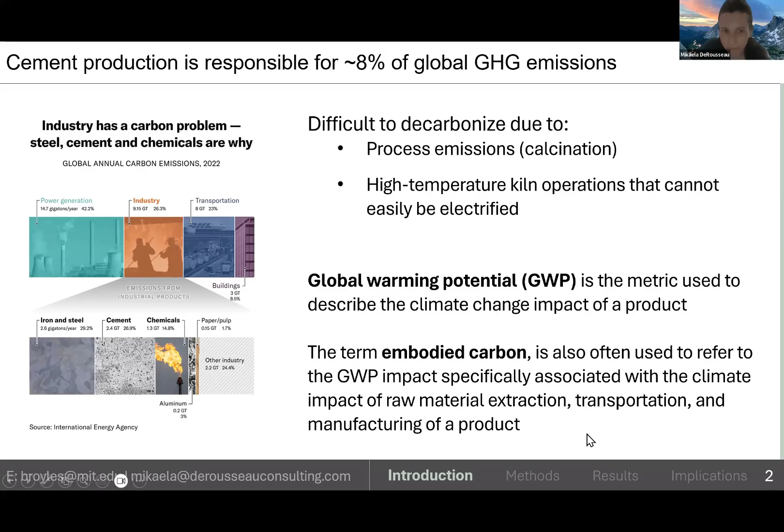Getting to more of the disclosure and reporting aspects of embodied carbon and global warming potential, one of the main tools for disclosure used at the product level are environmental product declarations, or EPDs. EPDs are used to report the environmental impacts, including GWP, but also other important environmental impacts of construction products like ready-mix concrete.

In North America, these EPDs are reported with a cradle-to-gate scope. This simply means that what's reported on an EPD is impacts associated with raw materials extraction and supply, transportation of those raw materials to the site, and manufacturing impacts at an actual facility—that's what's known by the manufacturer and reported in the EPD. This is distinct from other reporting under other standards, such as those occurring in Europe. So, that's good to know.

The declared unit, so the quantity of material for which the impacts are reported, is called the declared unit. And for ready-mix concrete, that's 1 cubic meter.

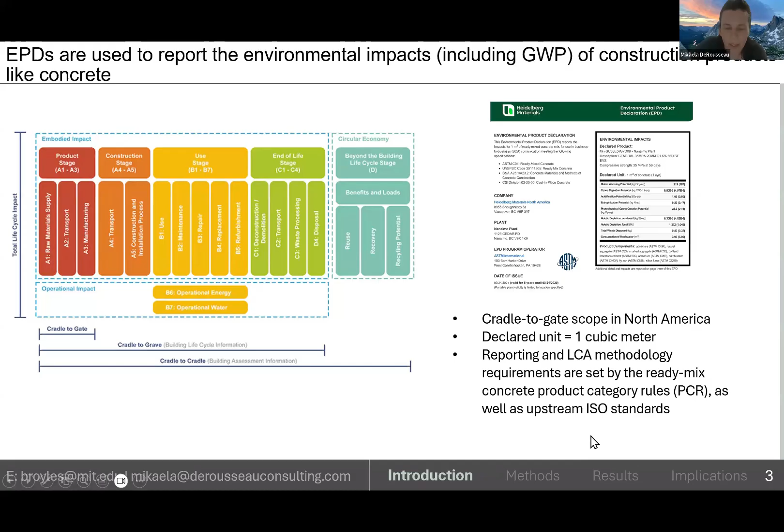The reporting and LCA methodology requirements in mass are set by the ready mixed concrete product category rules, or PCR, as well as a set of cascading ISO standards above it. So that's good to know about EPDs and how the rules are set.

Many folks are aware of how valuable EPDs are for understanding global warming potential impact for a product. They'll look at an EPD, look specifically at the GWP value, and make an assessment. But I think it's valuable to point out that EPDs contain a large amount of valuable information, especially in aggregate.

The product category rules are standardized for materials like ready mixed concrete. It's required by those rules that the manufacturer name be published on the EPD, the plant name and location have to be published, and the date of issue has to be there. Performance information, specifically the compressive strength at a certain curing time, has to be reported, and even product components have to be listed. This is good because it's standardized, and we can count on EPDs all having this information.

From a data set nerd perspective, there's a lot you can do once you have all that information extracted from PDFs. So I'm just alluding to the work here.

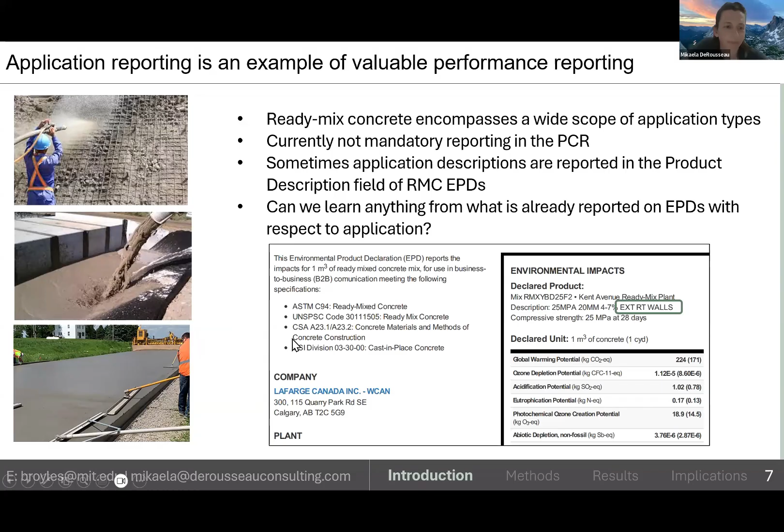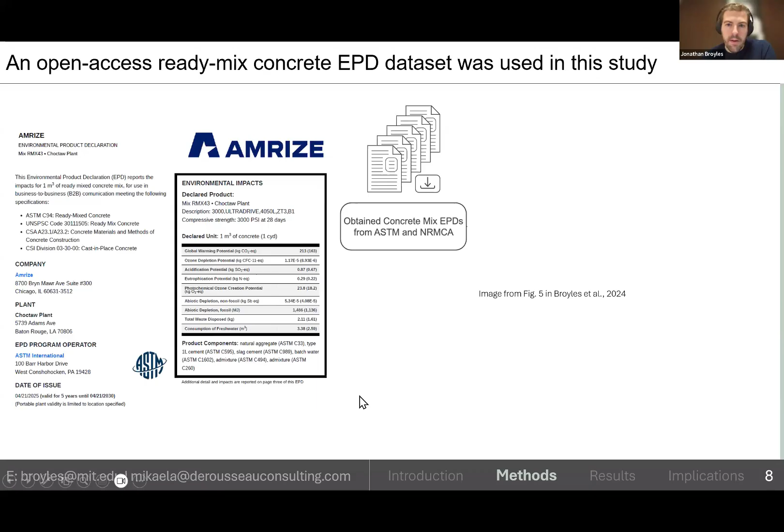Thanks, Mikaela, that was a great introduction to this work. To get at that question, we wanted to use a ready-mix concrete EPD data set, specifically one that I've curated over time, that I've made and developed. I collected a lot of different ready-mix concrete EPDs from ASTM, off their website, and from NRMCA, and then wrote a custom Python script to extract key information from EPDs.

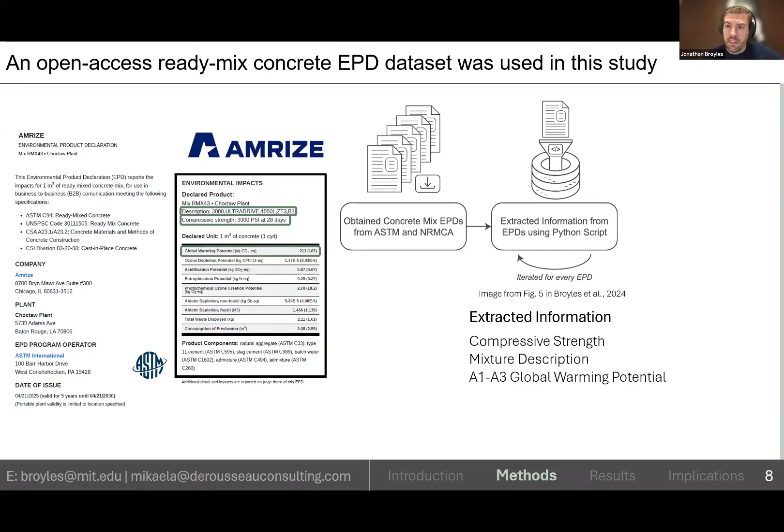Like Mikaela said, a lot of these EPDs are in PDFs, so I used a scraper to get information, including compressive strength, mixture description, the GWP—specifically A1 to A3 global warming potential—the product components, plant location, and a lot of other information.

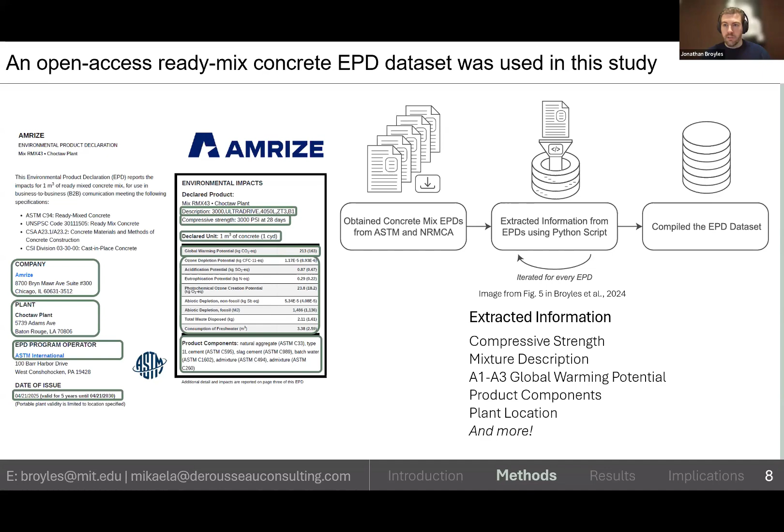I took all this information to populate a CSV file, or Excel spreadsheet. Currently it contains over 47,000 unique ready-mix concrete EPDs based in the United States—no EPDs currently manufactured in Canada or places outside the US. I do have a link for this, which I'll share at the end of the talk, so you can download and look at it today.

I originally made this EPD data set starting at the end of 2023. I published an open access paper explaining some of the fields and information I was gathering from the EPDs, and over time I've been updating the data set. The most recent update happened this past December, which has a lot of different fields, like the intended application, or what we're perceiving as the intended application, from the different concrete mixtures in this data set.

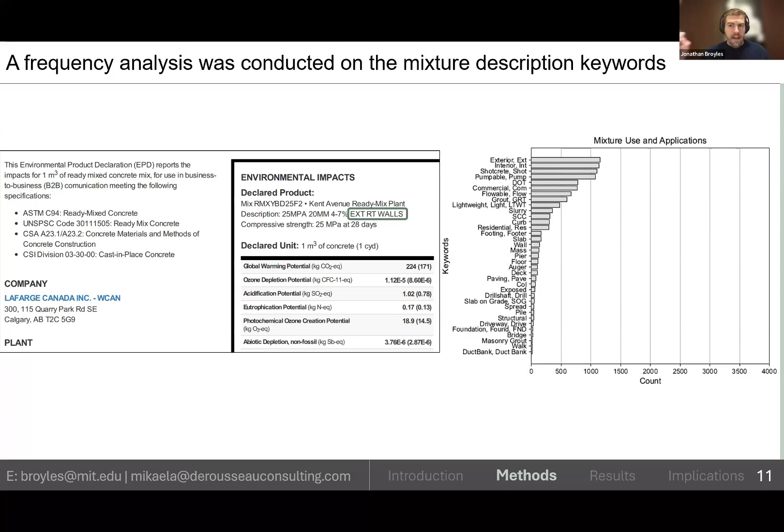Like Mikaela said, this isn't across all EPDs, but there are many EPDs that provide keywords in their mixture description label. So one of the things we did at the start of this study was a frequency analysis—what words are frequently coming up in the mixture description of these EPDs. We found a number of keywords associated with the use and intended application of these concrete mixtures, like exterior, interior, shotcrete, and so on—many different keywords that we could start to identify key applications based off of.

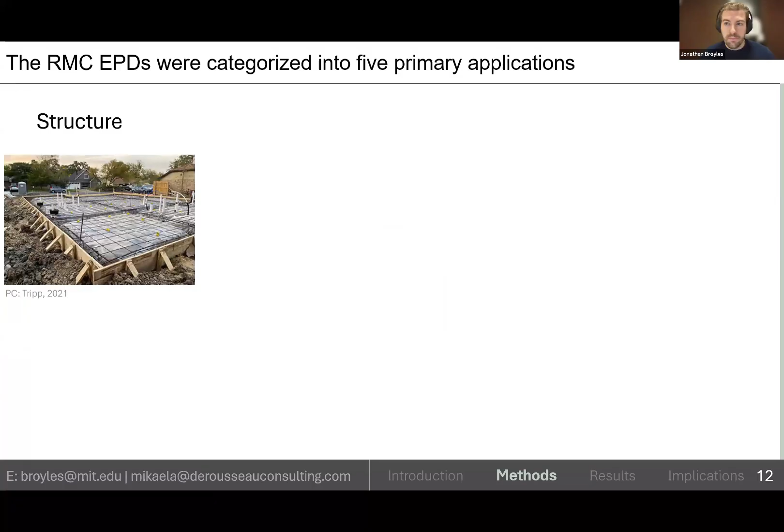That led us to identifying five primary applications of concrete: structural application, hardscape, paving, infrastructure, and lastly filler. These were the five different primary applications, again from what we were seeing in that keyword analysis.

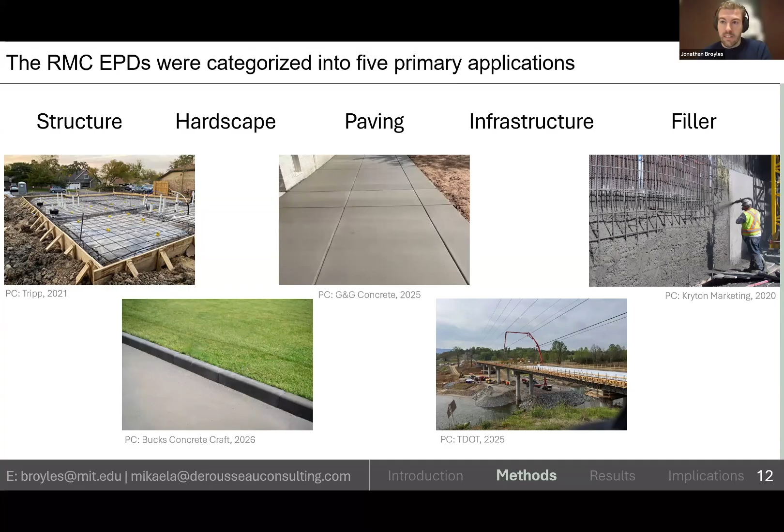Some of these application categories were further classified into subcategories. Looking specifically at structure, for example, there were subcategories including foundations and footings, slab on grade, elevated horizontal, wall, column. For LCA practitioners on this call, if you think about the different elements and components in a building, or even different projects where we use concrete, there are many different elements here, and we can see these different subgroups or subcategories based on a primary application.

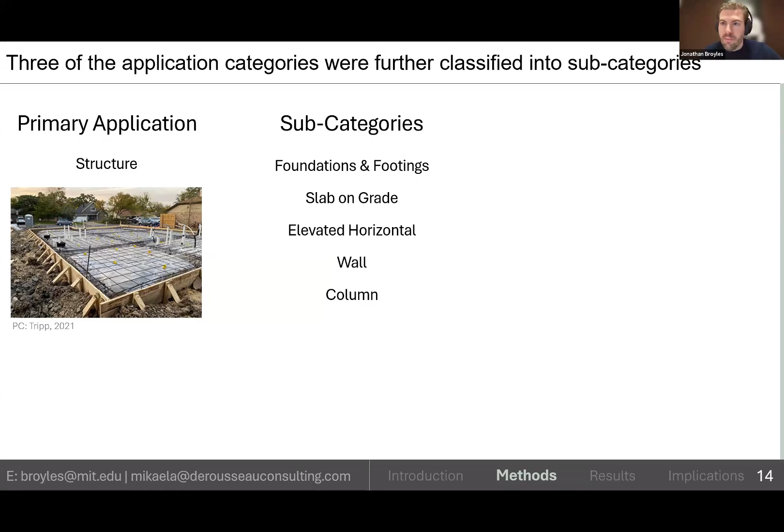From that keyword analysis, I associated these keywords to subcategories, which were tied into the primary application categories as well. So these keywords were used to categorize the EPDs, based off of the keywords in the mixture description provided in the EPDs.

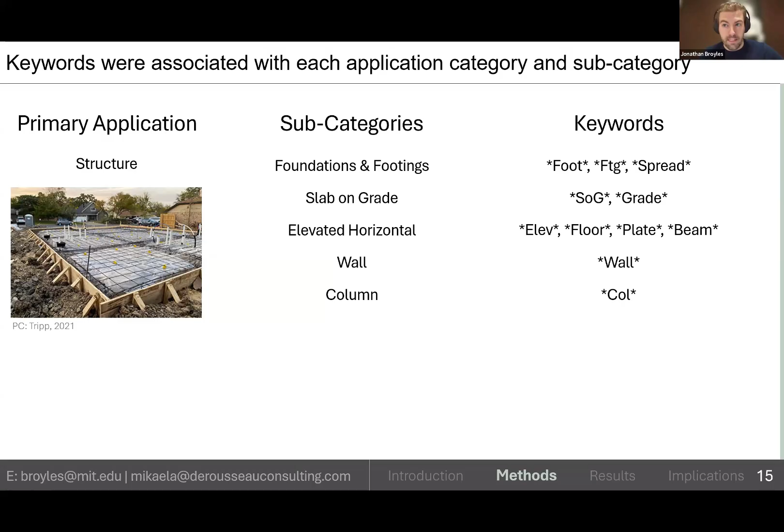Additionally, there were 5 other application labels, and that's because these were some of the most frequently found keywords in the keyword frequency analysis, especially exterior and interior, but we also saw a lot of commercial or residential keywords being pretty prominent, in addition to lightweight concretes.

The study did look at the GWP distributions and statistical analyses for these other application labels, but generally they were most helpful to further categorize the primary applications. For example, you might have an exterior wall, or a residential footing, which was also pretty prominent as a combination. So these were all the different application labels and categories we were defining in our study.

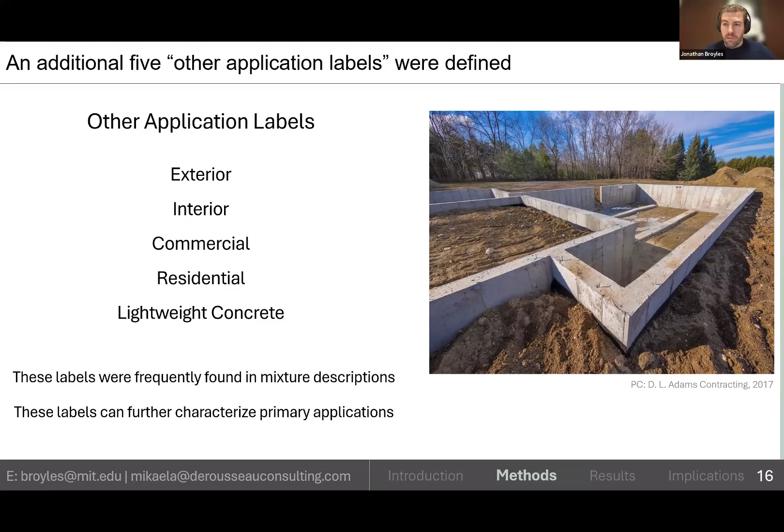Furthermore, we wanted to make sure that our specific subset of EPDs we were looking at in our study were close to apples to apples. So I started with north of 47,000 EPDs. I wanted to filter them to make sure they all had the same cure time of 28 days. Of course, you could look at other cure times as well, but only about 2,500 of those EPDs specify something that's not a 28-day cure time.

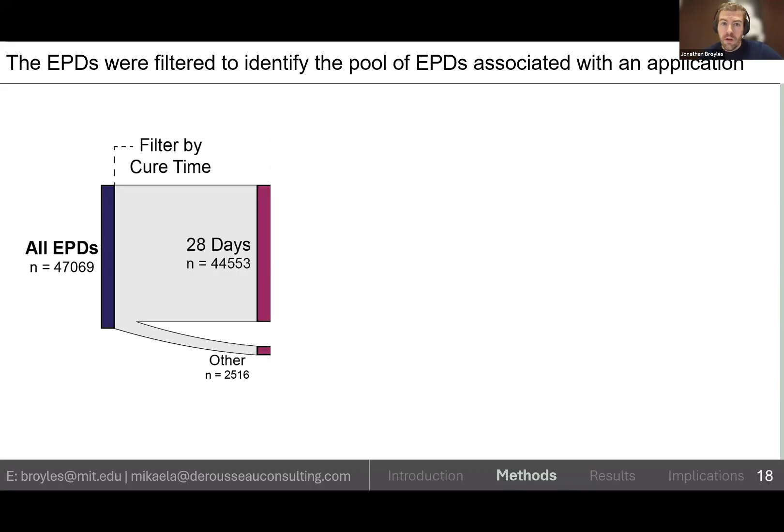I also wanted to look at a specific strength range, which I looked at across 6 different bins, but I basically filtered out anything above a compressive strength of 8,000 PSI, which only excluded 266. So most of the EPDs were within that strength range.

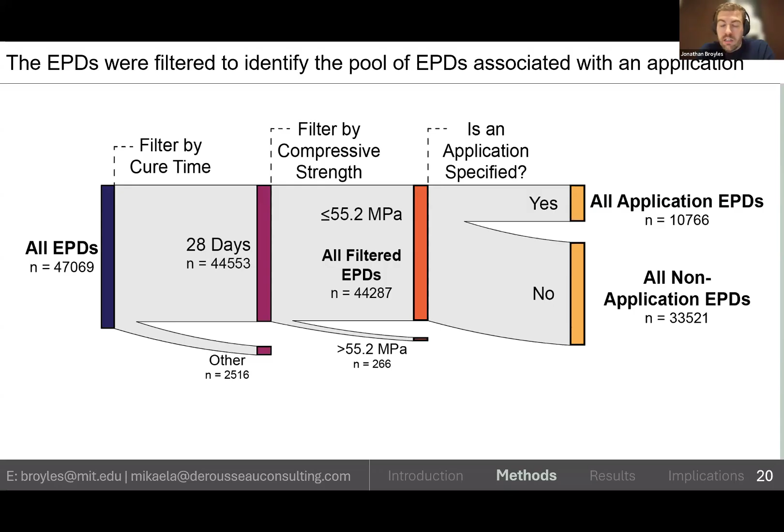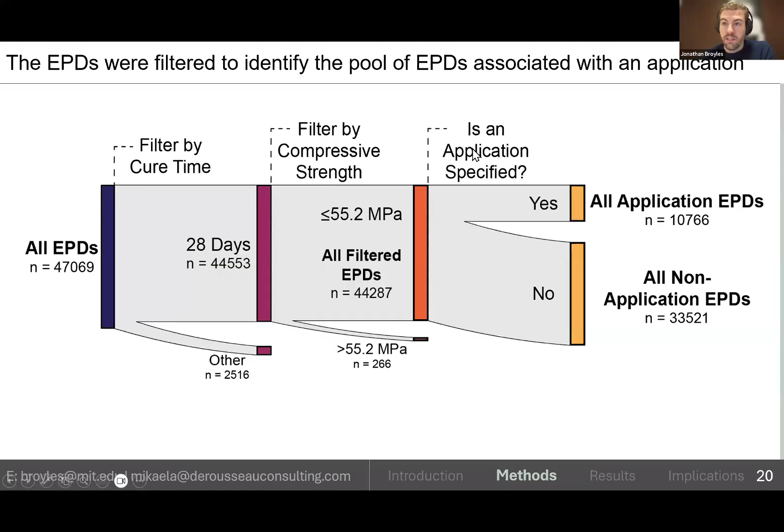After applying those different keywords associated with those different applications, I had different sets of EPDs corresponding to applications, and some, of course, that don't have an application associated with it, based off what's provided in the mixture description. So we ended up having 10,766 EPDs that were associated with one of those keywords attributed to an application.

I'll quickly pause here just to get you guys thinking. I won't do a show of hands, but think to yourself: which of these 5 primary applications do you think had the largest representation out of those 10,000 plus EPDs? Structure, hardscape, paving, infrastructure, filler. I'll give you 3 seconds to think.

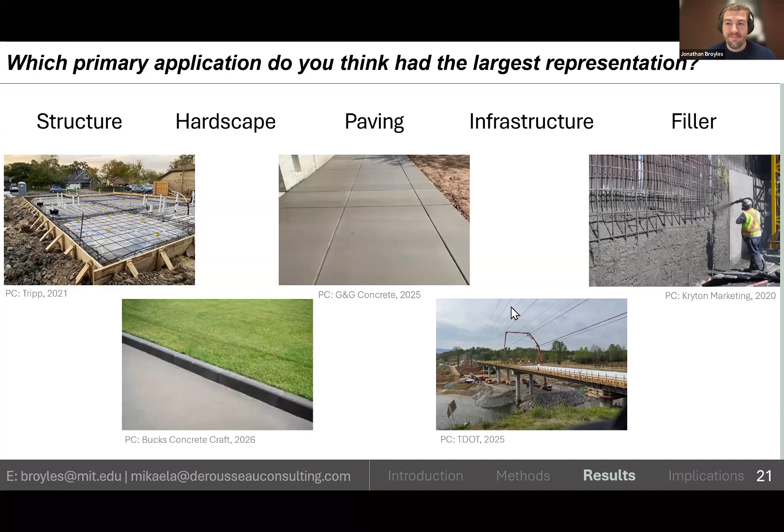Would it surprise you if I said that filler had the highest representation out of those 5 primary applications? I extended this to the 5 other applications as well, but it had by far the largest representation out of the EPDs we were analyzing, which surprised us pretty significantly.

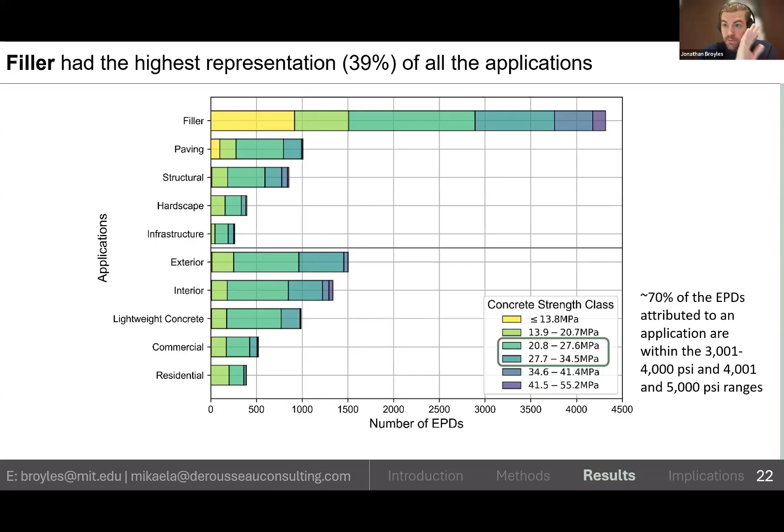One of the other key findings was that roughly 70% of the EPDs associated with an application were in these 2 different strength class ranges: 3,001 to 4,000 PSI, and 4,001 to 5,000 PSI. For the remainder of this presentation, I'll be sharing results for those 2 strength classes, but we did do the analysis for all the other strength class ranges as well.

To help orient us, I'm looking first at the 3 different EPD sets: the filtered EPDs, the non-application EPDs, and the application EPDs for a compressive strength of 3,001 to 4,000 PSI. Global warming potential, that's the A1 to A3 GWP, is on the x-axis. You can see the application EPDs have a similar distribution for GWP compared to the non-application EPDs and the filtered EPDs, so that includes both sets.

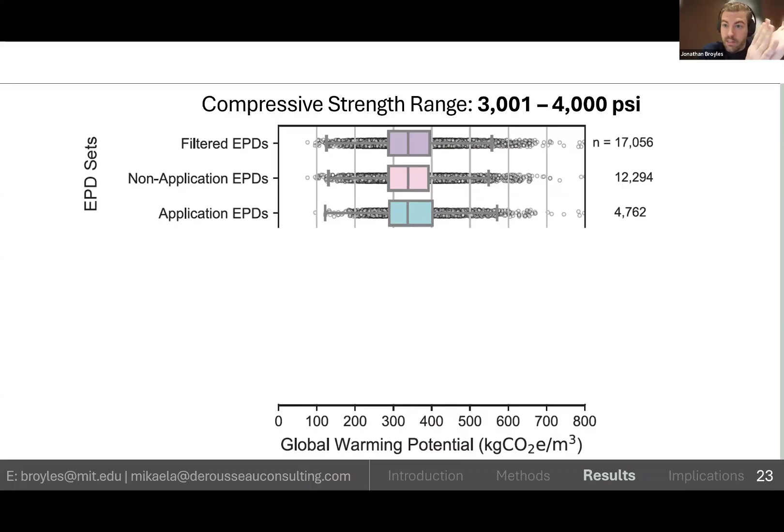When I break this down into those 5 primary applications, we can see there are differences, and it's visually clear. Fillers had a pretty high GWP, trending higher compared to the other 4 applications. Paving and structure, on the other hand, trended with lower GWPs, which is quite interesting.

If you think about where that median is for the structure subset, roughly a GWP around 290, that's about at the 25th percentile when you consider all filtered EPDs. So we found that pretty interesting.

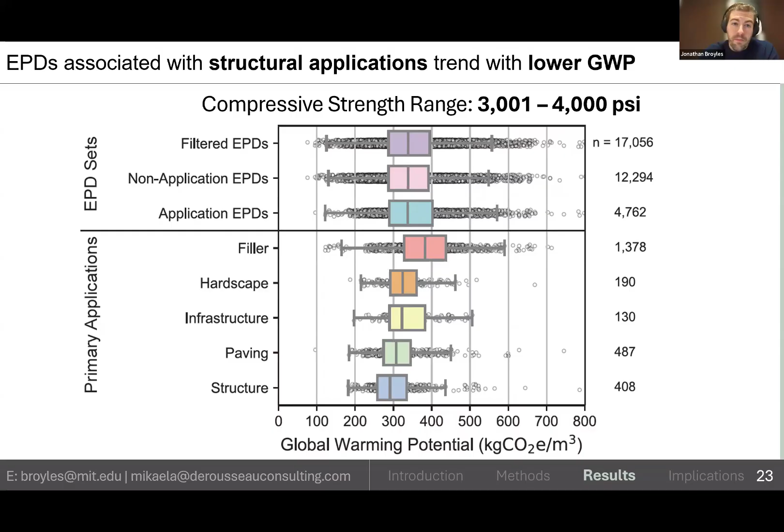When we looked at the 4,001 to 5,000 PSI strength range, we similarly found that application hierarchy where EPDs associated with a filler application trended higher, then hardscape, then infrastructure, then paving, then structure, although those two are pretty close — actually paving might even be a little ahead. But both of those trended a bit lower.

So we thought these studies, or these findings, were really interesting. They were frankly surprising to us.

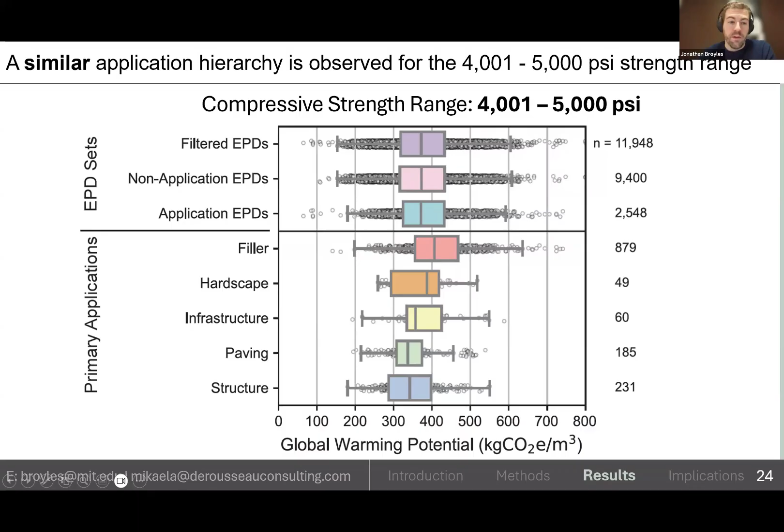So we wanted to confirm what we were seeing visually in these box and whisker plots with some statistical tests. We performed two different statistical tests to basically pair up the applications to one another, to confirm or reject the idea that they have statistically different global warming potentials.

The two statistical tests were the Kolmogorov-Smirnov test, or KS test, and the Mann-Whitney U test. The KS test basically tests the similarity of the distribution of the GWPs between application pairings. The Mann-Whitney, for our case, was more or less seeing if there's a statistically similar median GWP within that distribution. So two different statistical tests, but they kind of point to the same thing.

In our study, if an application pairing, like filler and structure, had a p-value below 0.05, that would be proof that they have statistically different global warming potentials. This is a heat map showing those results. As you can probably quickly see, there's a lot of white and a lot of light blue, which means there's a lot of statistically different global warming potentials across these different application pairings.

Again, 85% of these pairings had statistically different GWPs. The only ones that didn't were the pairing between infrastructure and hardscape, which was interesting for both strength classes, and then structure and paving for the Mann-Whitney. So now we not only have the visual observation that there are GWP differences, we have statistical knowledge that there are statistically different GWPs here.

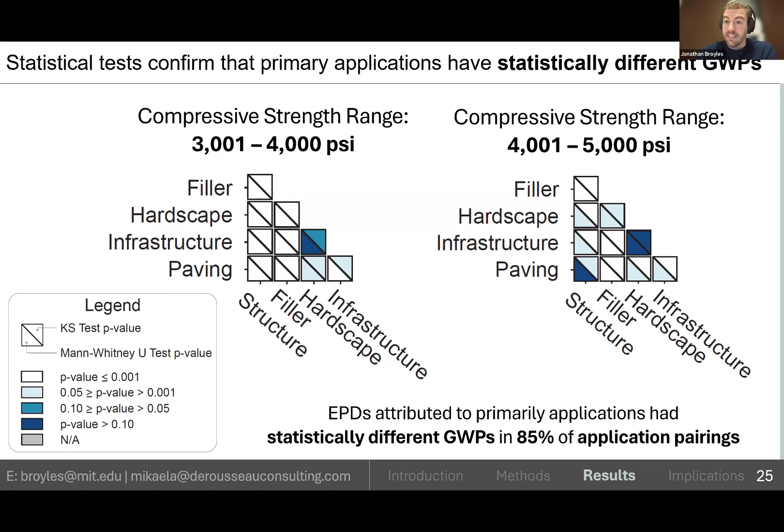So why do these differences exist? We were thinking about this, and I think the most obvious explanation was something that Mikaela alluded to at the start: cement drives the GWP of concrete mixtures. So certain concrete applications just have more cement than others.

Some, like fillers, cement grouts, shotcrete, likely have more cement content, so they trend with higher GWPs. That's intuitive. The challenge is we don't know the mixture proportions of all of these different concrete mixtures, so we can't confirm that, although we have high suspicion that cement is driving a lot of these differences in GWPs.

We also thought about three other ways we could explore these differences using information extracted from EPDs. We looked at the use of supplementary cementitious materials, or SCMs, that were reported in those product components that Mikaela referenced earlier. We also looked at the type of cement, whether the mixture specified OPC, ordinary Portland cement, versus PLC, Portland limestone cement. And then we also looked at the type of Portland cement data, what LCI source was used.

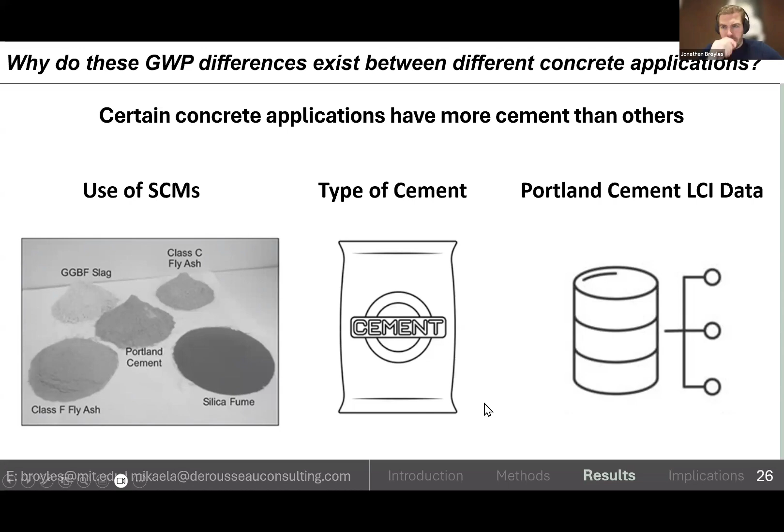We did some pretty deep dives into this, and I don't want to spend a ton of time on each one, but I'll share the highlights. Going first to SCM analysis, we found, which makes sense, that when concrete mixtures report the use of SCMs, they generally have lower global warming potential.

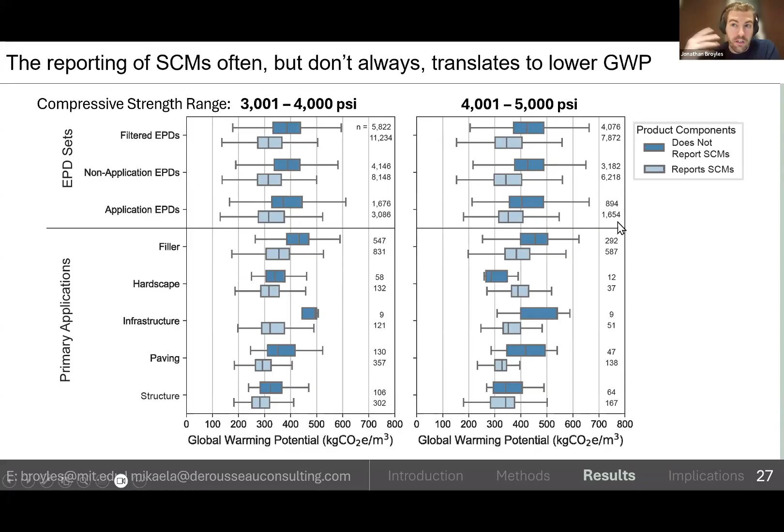If you noted, I kind of breezed over this looking at the SCMs. Many application EPDs, 3,000 out of 4,700 EPDs for the 3,001 to 4,000 PSI strength range, did report the use of an SCM, similar for the 4,001 to 5,000 PSI strength range. We don't see that same large use of PLC in the EPDs - much lower, maybe a quarter to a third of the application EPDs using PLC. So the use of PLC does indicate lower GWPs, but there isn't one application that is definitely using PLC.

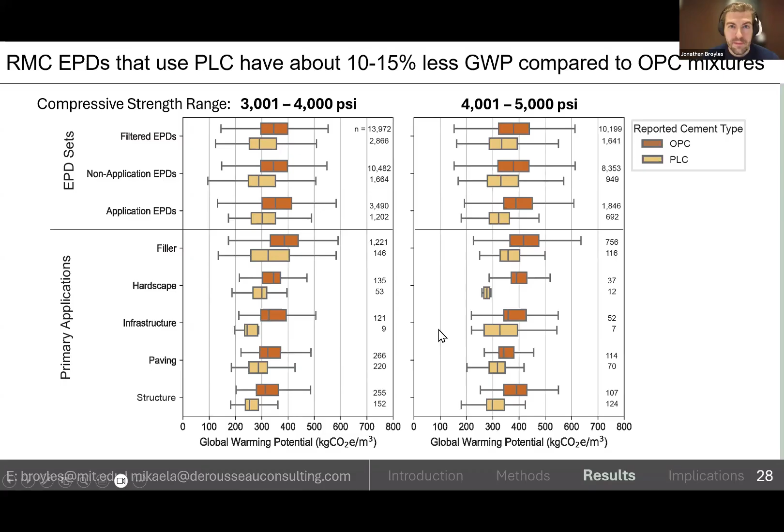You can kind of see here, fillers - about 10% of EPDs do, a little more when you consider the 4,001 to 5,000 PSI strength range. Paving - a lot of paving EPDs in our analysis did use PLC compared to OPC, which we found interesting, and then a number of structural EPDs too. But again, there's no clear distinction that there are EPDs or applications that definitely do or don't use PLC, except maybe for infrastructure. That was another interesting finding.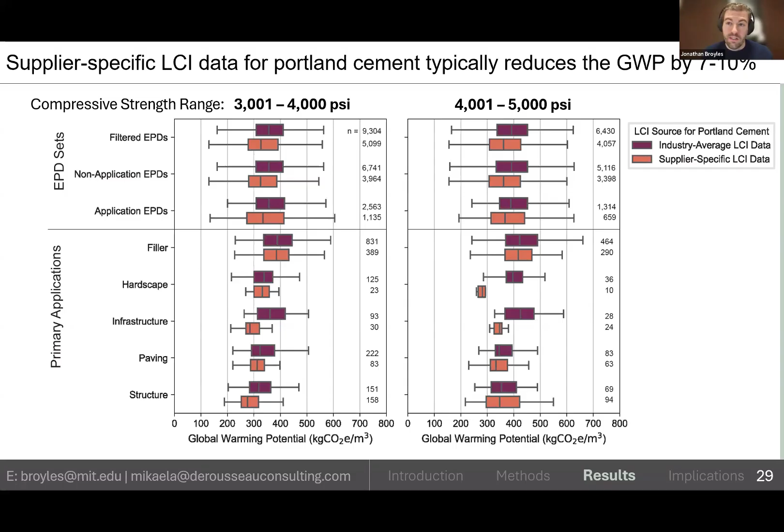All right, so let's put a bow on this. As we've been saying, there are statistically different GWPs when you look at the 5 different applications. So what does that mean? Really, what we're proposing is that the product category rule, or PCR, for ready-mix concrete should be revised in the future to include the specification of an application reporting field, at least for these different primary applications.

That's just because we want to enable more fair comparisons between EPDs. It doesn't make sense if you're comparing a ready-mix concrete EPD that has a filler application to one that has a structural application like a foundation. As we have shown in our study, there's a huge GWP disparity between the two different applications.

Paving and structure statistically trended with lower GWPs. I mentioned filler trends with higher GWPs. So for those LCA practitioners and sustainability consultants on the call, your whole building LCAs that rely on application-agnostic GWPs could actually lead to larger or inflated GWPs if you're not thinking about the different applications.

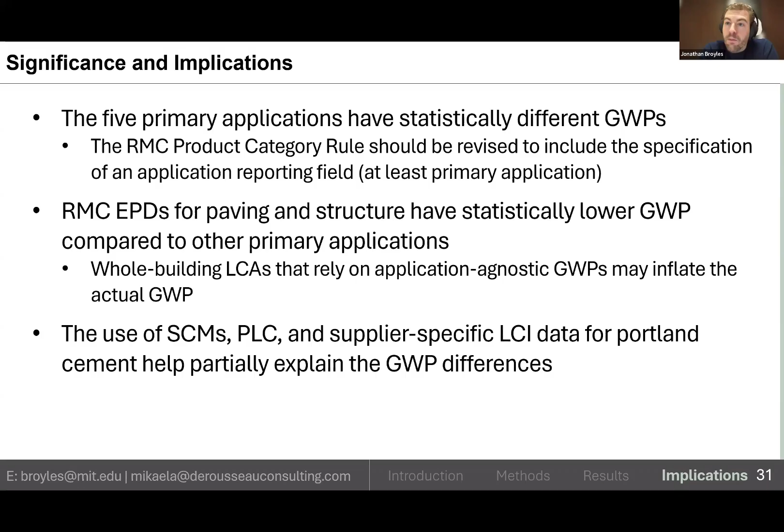Lastly, the use of SCMs, using Portland limestone cement type 1L, and the use or reporting of supplier-specific LCI data can partially explain the GWP differences, but not completely explain these differences. So for people looking at using and procuring ready-mix concrete EPDs, definitely look for these characteristics, because even if they don't fully explain why we're seeing the differences in GWP in our study, these are clear indicators that certain concrete mixtures have lower GWP than others. So again, for those on the call, look for those characteristics when you're trying to reduce and minimize your GWP.

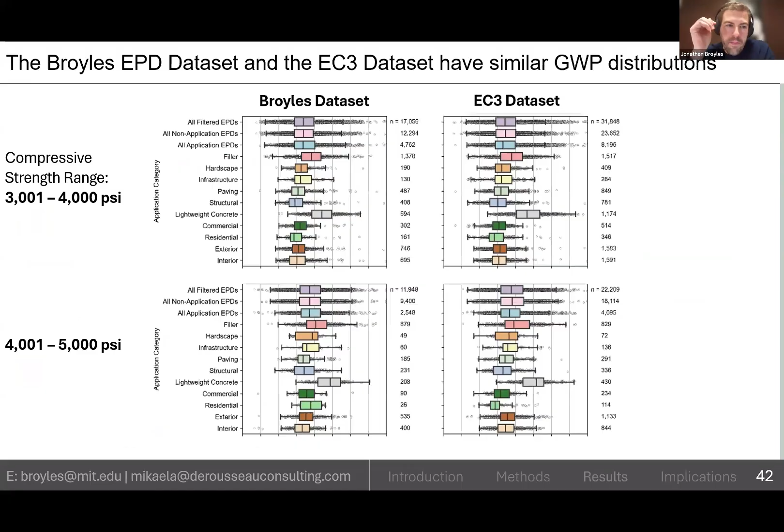Great to see this too. I think it really helps give some context on how it's sorted, and it's a very interesting engine that you've used to make this analysis.

The other question was from Nathan. I think, Mikaela, you answered it regarding reporting versus not reporting SCMs on slide 27: does this imply that EPDs that did not report SCMs don't have SCMs, or just that they did not present that information? Any context you want to add to that, Mikaela? I don't think so. I think if 'did not report' isn't clear, it just means the mix didn't have any information related to SCMs on it.